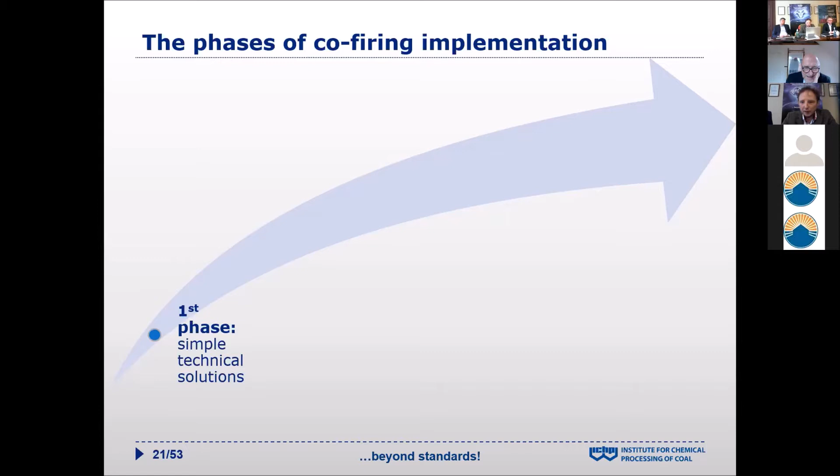During our development, we recognize some phases of the development. The first phase is very simple one. We just want to touch the technology. We use very small biomass share. But the second...

Phase is more advanced, when we applied the dedicated co-firing installation. I will show what is the difference between these phases. The more advanced solution, the third phase, is when we apply the 100% biomass boilers, very specific units dedicated only for specific biomass.

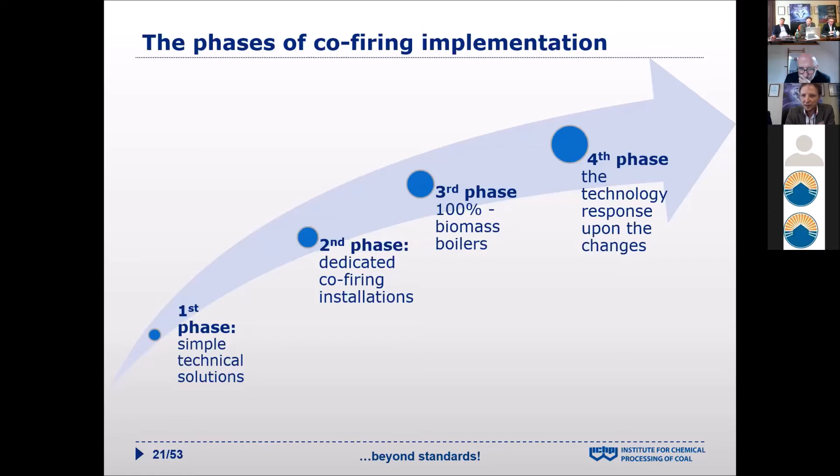But we also recognize a fourth phase. What does it mean? We notice some technology response upon the changes. This is why I explain the issue about the legislations and obligatory increase of agricultural biomass. It is not only a legal issue, but it also has some consequences in the technology. So we recognize this fourth phase as a response to this change.

Okay, so the first phase, there are in fact simple technical solutions. The first question was how does it work, if it is possible to use biomass in our power plant system. So we start combustion with very low mass of biomass, in the range from 5 to 10%. We use what we call very easy biomass - that means wood biomass, less problematic biomass in the first step, sawdust and wood chips.

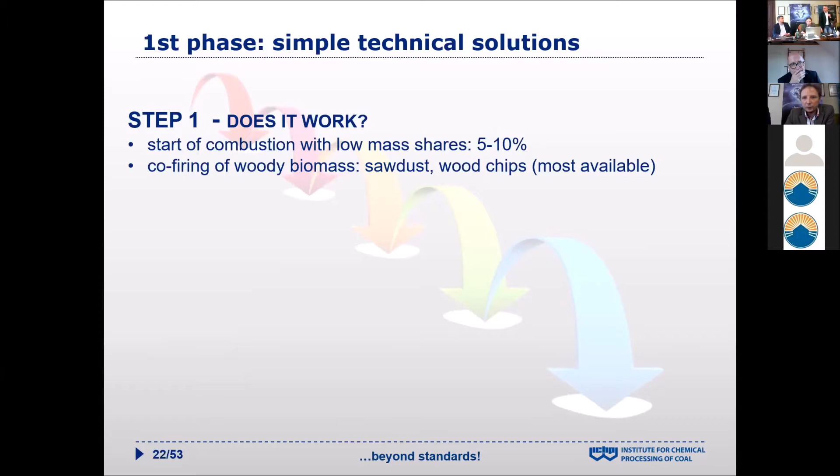But in the second step, the question was, can we go with higher shares? So we try to increase the biomass share in the fuel mix. It was between more or less 15 to 20%. One example was 30%. The question is how does not only wood but also agro biomass and pellets made of agro and wood biomass behave.

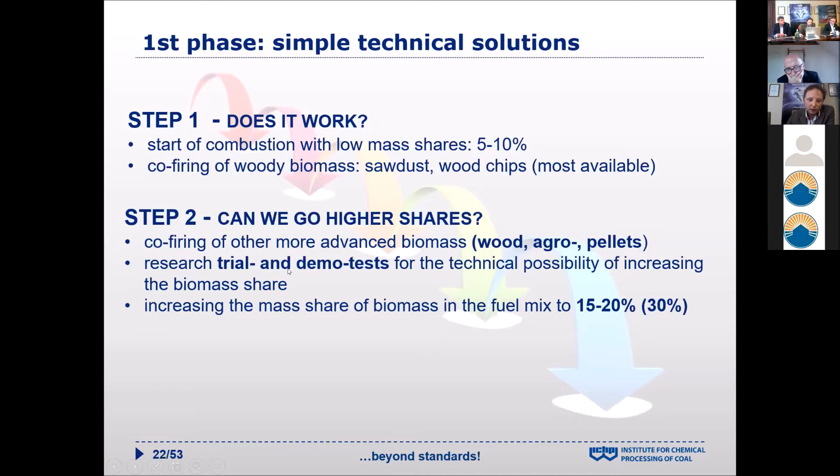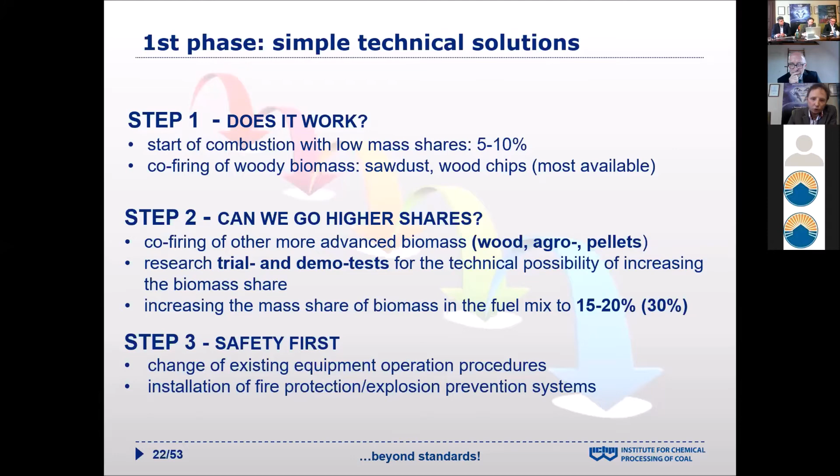We carried out the trial and demo tests to touch the reality of co-firing. The third step was safety, because it is very obvious - if you increase the biomass share, you increase the possibility of some undesired causes like explosions, fires. So let me share some examples of the first step, as I said, the simplest one.

So you can see it was very simple biomass collection, just under the open sky, sometimes without any shed, without any building, silos, and so forth.

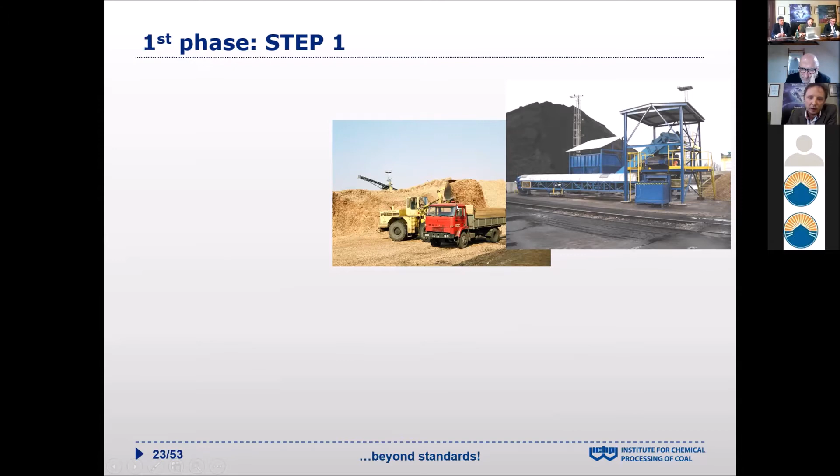The second thing, just message, very short snapshots from the transportation line. You can see, for example, the wood sawdust there is transported by a belt conveyor, and it was mixed with coal - we call it a sandwich. And after that you can see the tank, as I said, this is the place where we have to store your biomass mixed with coal. You just fulfill your tank and you have to burn it.

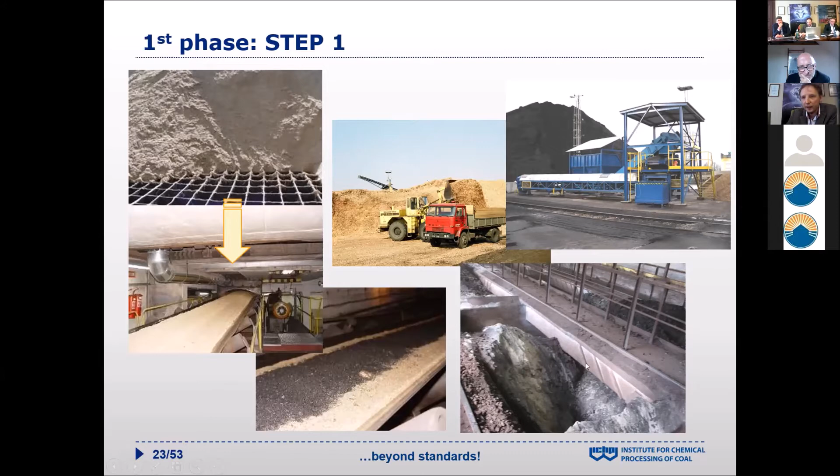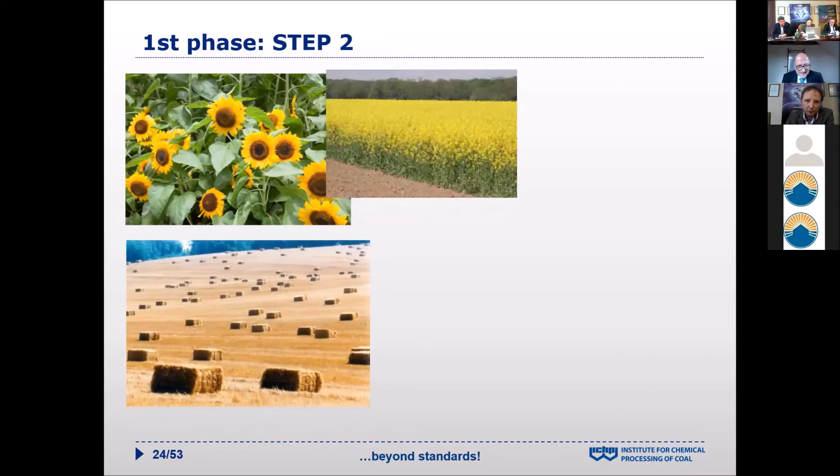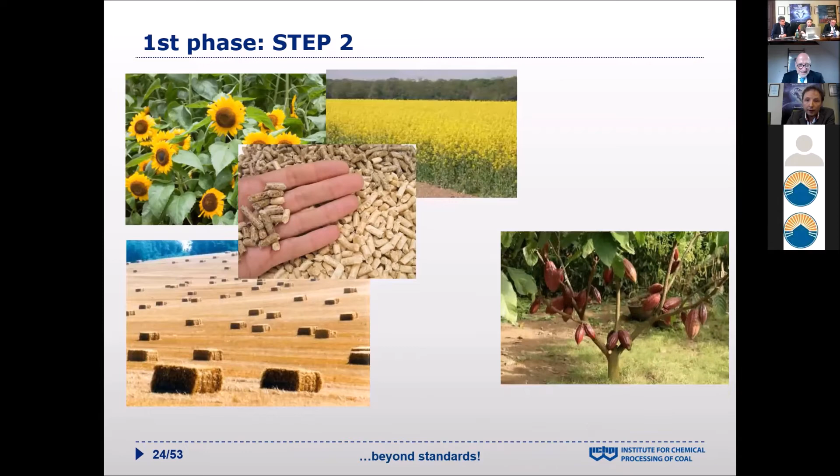So still first phase, but the second step is to change the biomass kind. We use not only the sawdust, the wood biomass, but also we use other ones like sunflower husk, straw, but also exotic biomass from our point of view - that means palm kernel shell or cocoa shells.

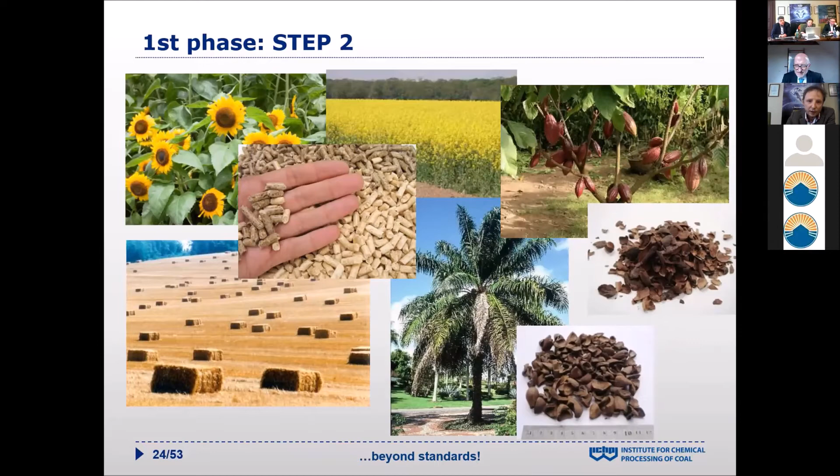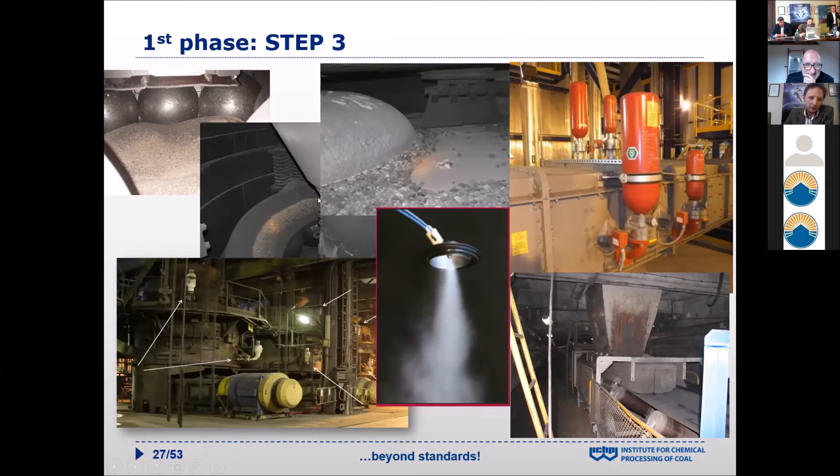And the step safety issues - I will show some examples just now. You can see examples of, for example, the HRD system. It is a fire extinguisher combined with control system, and if the detectors notice some fire or explosion, they turn on the extinguisher, for example, inside the transportation system, inside the mill. Another solution is the foggers, or water droplets beam, installed in some transportation systems or even in a mill. You can see here inside the zone of the mill after some processing of biomass and coal.

Okay, the second phase, as I said, more advanced. What was the reason? Because we want to increase the mass share of co-fired biomass to 60%. If we consider only the first phase, it was not possible to increase - the maximal share was 30%. So it was obvious, very reasonable, to jump into the second phase.

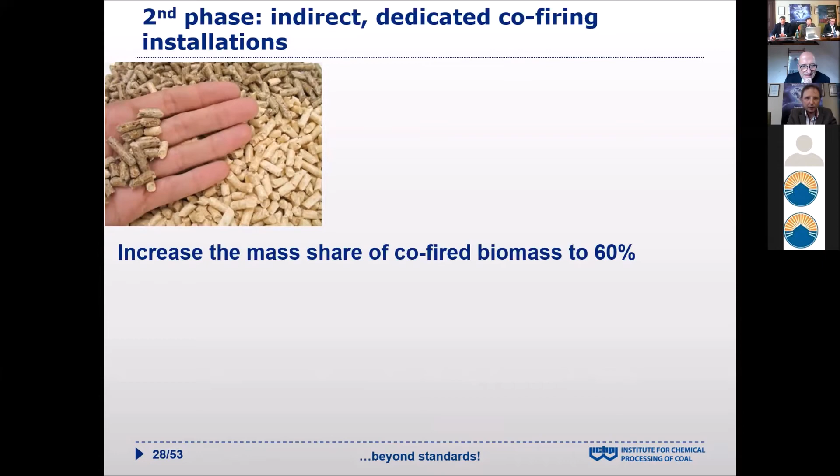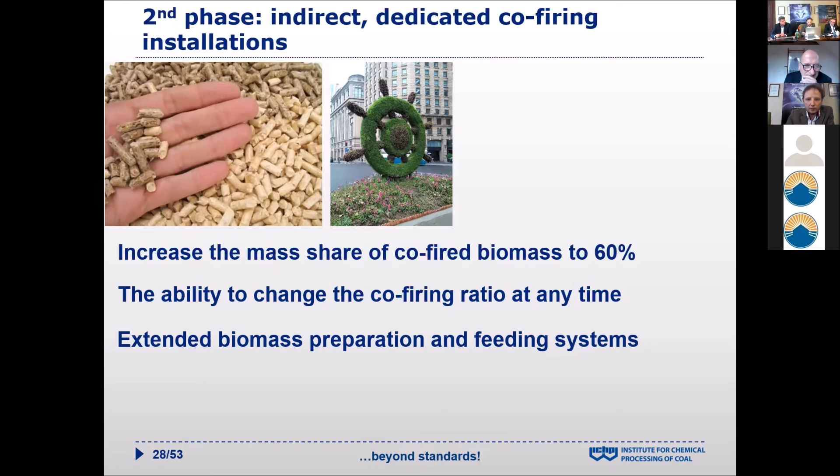Another thing was to have ability to control the biomass stream anytime - even if you want to switch off the biomass stream at one moment, you have to have some specific transportation system. Also the reason was the implementation of the flail hammer. You can see on the right hand side is a middle-age flail mill. They just crack the biomass to separate the grains from the straw.

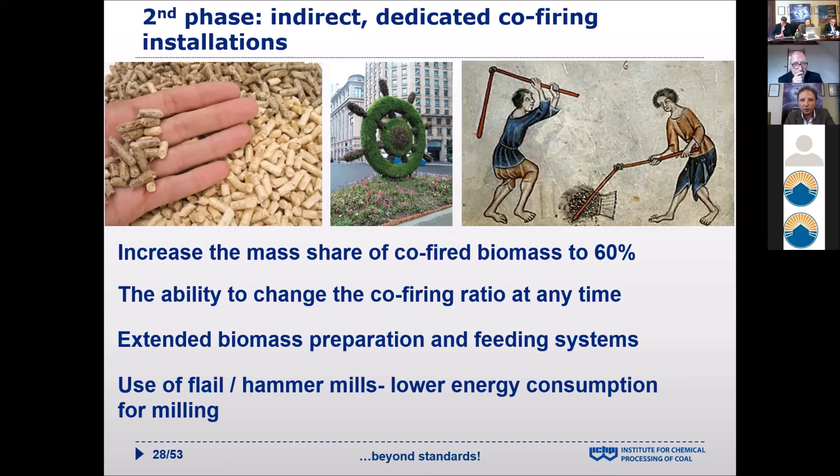Of course, the flail hammer is much more advanced, but I want to show what is the main idea. These flail hammers show lower energy consumption, so it was the point in time to switch into the second phase. So here are a few examples, a few pictures of this second phase.

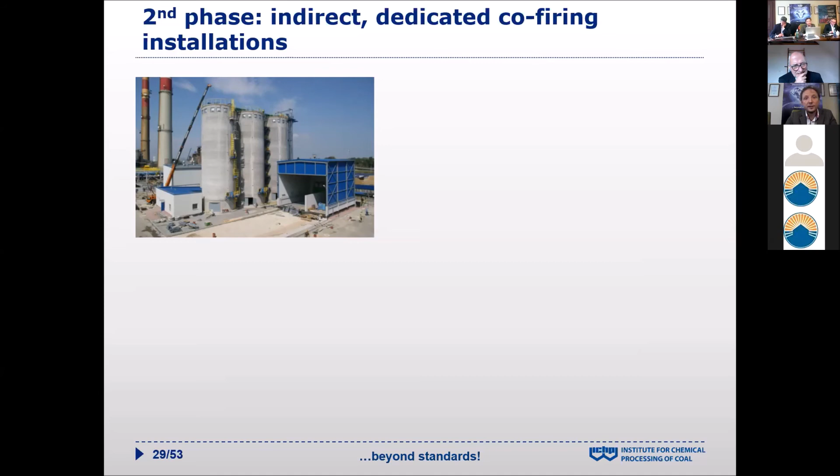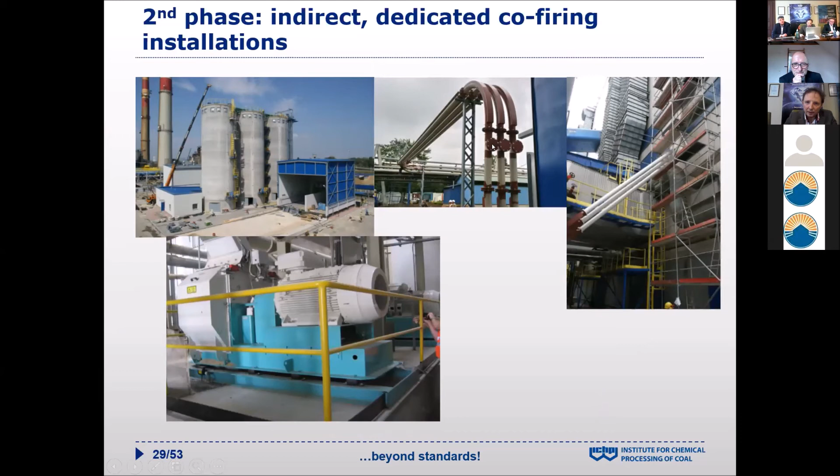So this is more advanced technology. As you can see, biomass was not just collected on the floor, but you have to build silos, you have to build some pneumatic transportation lines. You can see here is a line, pneumatic transportation lines - they transport the biomass from the tanks, from the silos, into the boiler.

Also, if we want to increase the biomass share, we have to change the technology of burning. This picture shows the burner retrofitted for co-firing. In the center, you can see the pipe of biomass transportation, and it can be used with a higher biomass share.

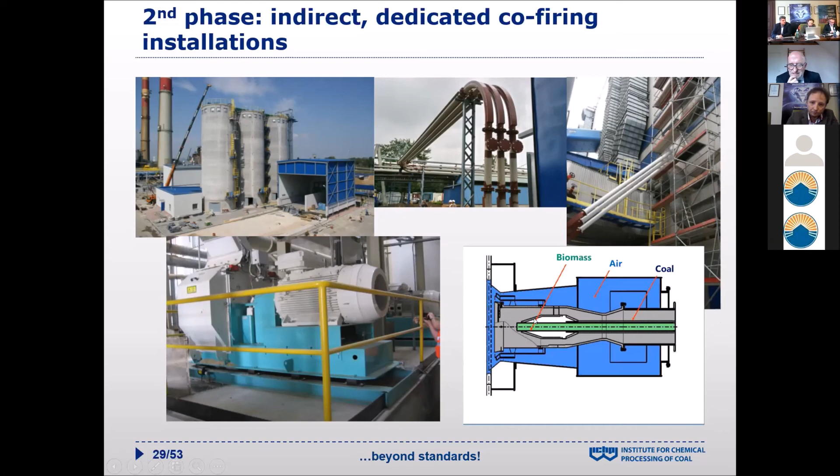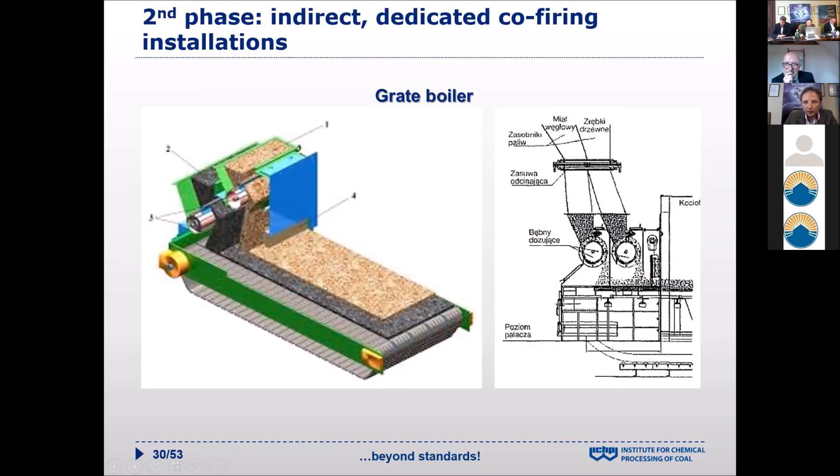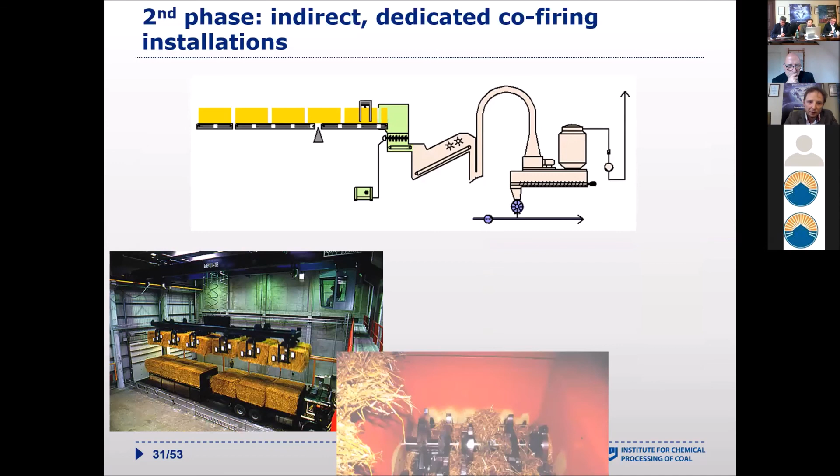The second phase is also an issue of the grate boilers. You can see an example of the technology, very interesting. The grate boiler is very sensitive to the fuel mixed on the grate. What does it mean? We have to prepare biomass just before the grate, prepared as I previously said as the sandwich, so that we can burn it in a controlled way. The second phase is also very specific, the dedicated co-firing installations. You can see some example of the...